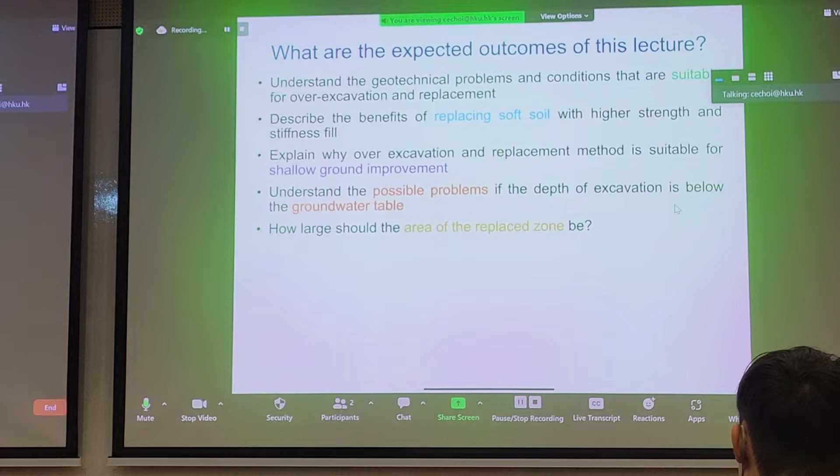Other issues: we have to identify when shallow replacement is not a suitable means of ground improvement. And last but not least, we need to assess whether carrying out replacement somehow distributes stress deeper into the ground, with an enhanced angle of stress distribution. So the last point is, how big should the area of the replacement zone actually be? We'll try to answer all these questions in this module.

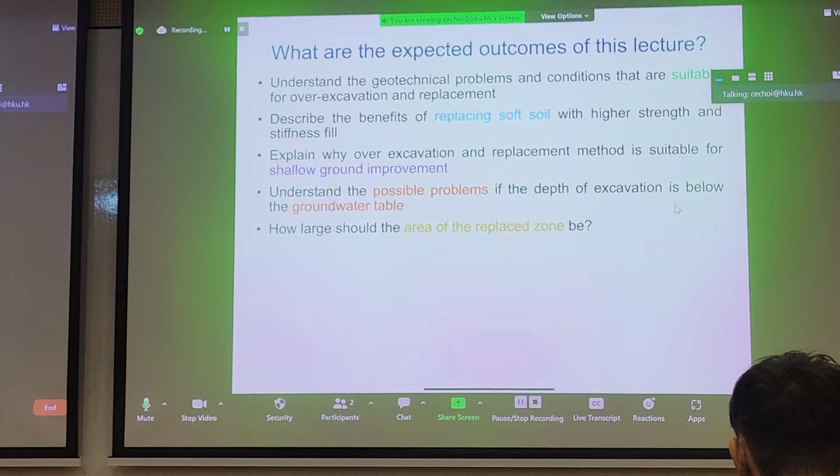Now, what is over-excavation and replacement? It's essentially a fancy term for excavate, remove soil, and replace it with stronger soil. Some questions you should be asking: how much soil should we replace? That's quite important, because the more soil you excavate, the more expensive it becomes. Once you excavate soil, you have to dispose of it, and disposing soil is not easy—sometimes you have to transport it far away, and you're charged per cubic meter of material disposed. So the first question is how wide the load spreading is and how deep we have to dig into the ground so that our shallow foundation is still capable of being serviceable and withstanding ultimate limit states.

As I mentioned in the beginning, the materials that we often use for replacement are very competent. We can use rock, very high strength gravel or sand, and some of these can be called engineering fill material in Hong Kong. We can also use chemically stabilized soil.

We'll talk about chemical stabilization in one of our later modules. Deep cement mixing is perhaps one type of chemical means. Pneumatic flow mixing is another.

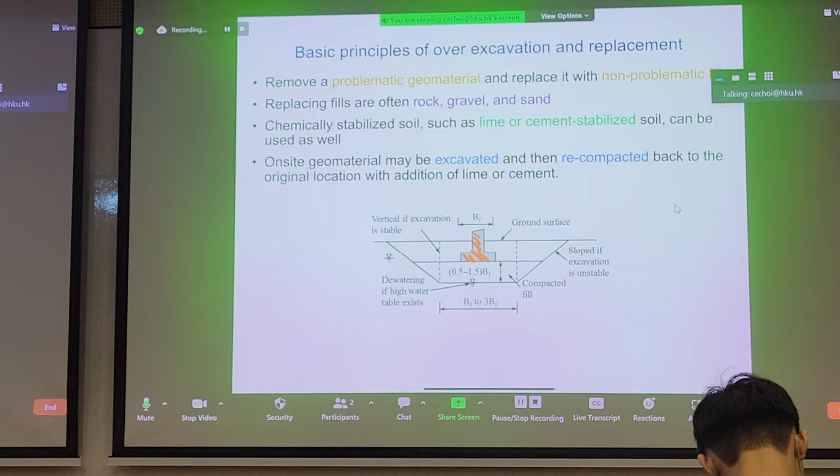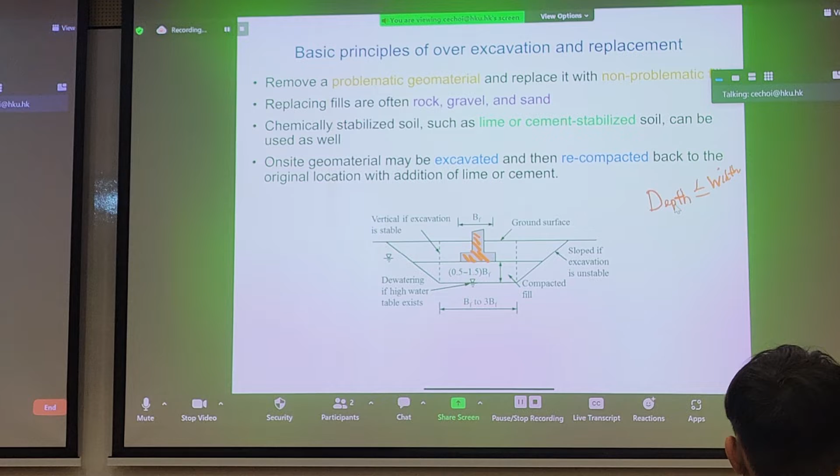If you take a look at the schematic at the bottom of the slide here, this is a typical shallow footing. For those of you in foundation course already, I'm sure you've covered this. So how do we denote whether something is shallow or deep? Well, the general rule of thumb is if the depth of your foundation is less than or equal to the width of your footing, we generally say that's a shallow foundation.

What are examples of deep foundation? Piles, right? Piles are deep foundation.

So this is an example of a shallow foundation. What you see here, we could probably assume it's a strip footing, meaning that it goes into the page infinitely. And what's the definition for a strip footing? Well, if your length to width ratio is greater than 5, we can assume that it's a strip footing.

And if you remember from your foundations class, Terzaghi's general bearing capacity equation assumes, from a rudimentary point of view, a strip footing. Of course, it can be converted into a circular and square footing, but we can adjust for those using shape factors, as you'll see later on.

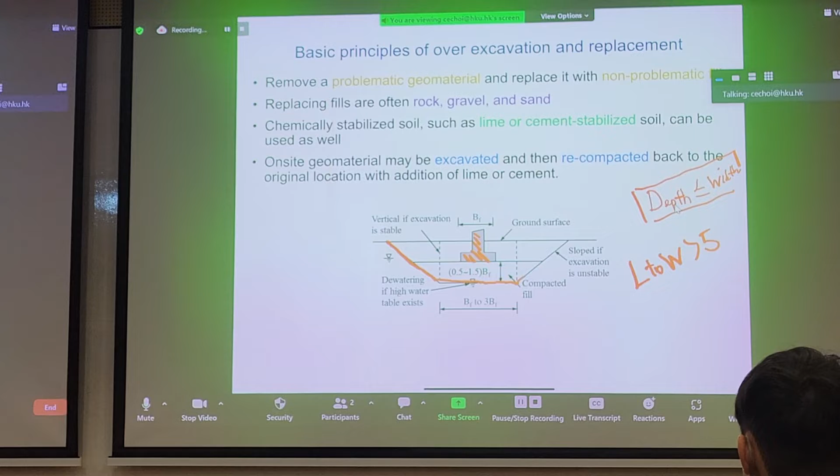So generally for over-excavation replacement, what we would like to do is think about this region here, particularly the soil underneath your footing. The soil underneath your footing needs to be strong enough. If it's a soft soil or clay, we want to remove it and replace it with engineering fill material. But then the question is, how thick does this fill material have to be? To answer this, you have to understand the prevailing failure mechanisms that can take place, and then design the thickness and strength of your replacement material based on overcoming these failure mechanisms.

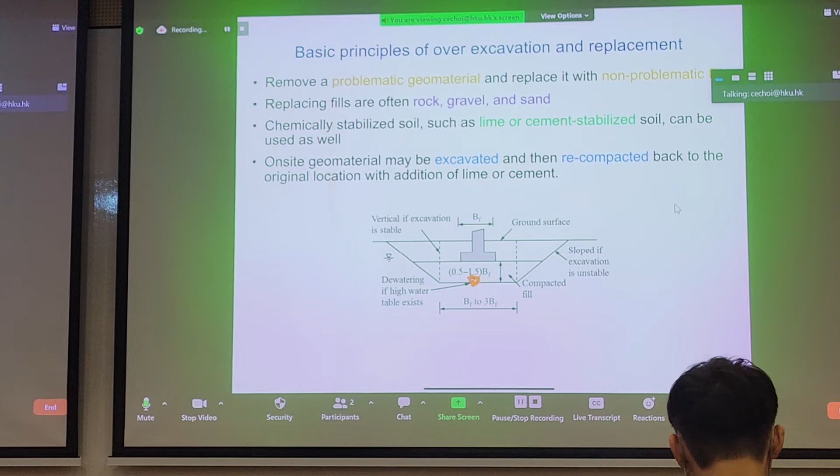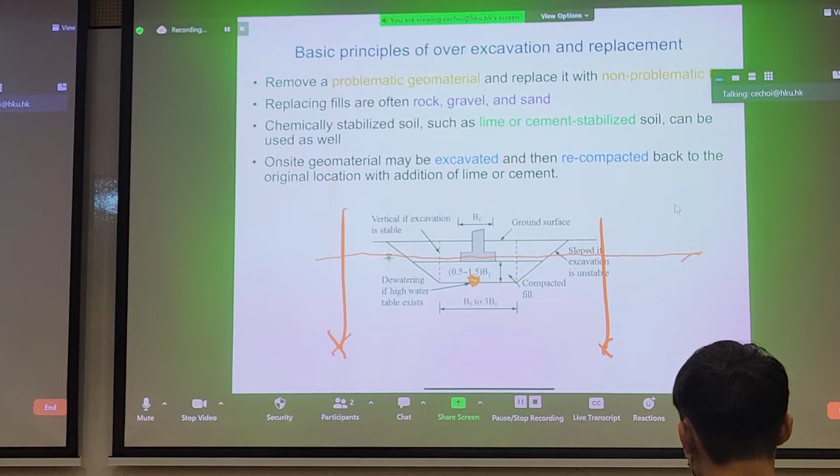Another thing you see here is the groundwater table. You can see it here, but often if you want to carry out replacement, you need to dewater the ground. Some ways you can do it are install dewatering wells, and if the groundwater table outside your excavation is here initially, then you can draw it down. Maybe sink another one here. You draw down the groundwater table so you can actually work inside the site first.

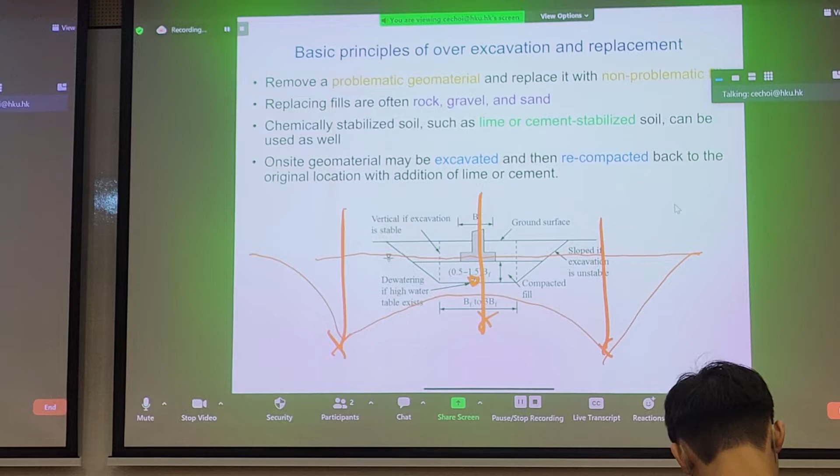So the main focus of over-excavation replacement is excavating and replacing. Now, under what circumstances is over-excavation replacement suitable? Well, there are loads of problematic soils, and we've covered this, including what you see on the slide here: loose fill, loose sand, silt, expansive soil, collapsible soil, liquefiable soil, and in colder regions, frozen soils as well.

These could excessively compress due to climate loading, due to subtle shear stresses, can even be seismic, and it can cause your shallow footing to punch through the soil.

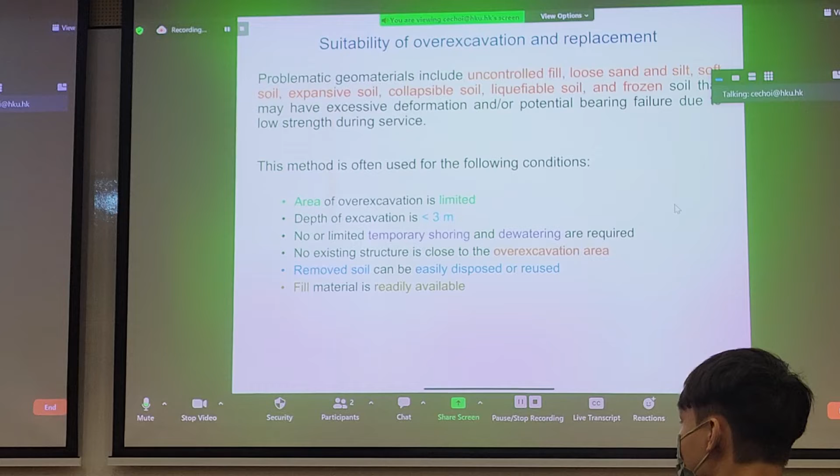We always talk about the birthday cake analogy. So if you have your hand on a birthday cake, if the birthday cake is not strong enough - let's say you have an ice cream cake, and you just took it out of the freezer, it's quite strong, right? You can push down on it. But if it's a cream cake, you're probably going to push right through. So that would be your bearing capacity, the cake analogy here.

So we don't want our shallow footing to punch through, or push through, or shear through our soil underneath. So any soil that you perceive as extremely low strength, you can assess this with what we talked about already: CPT or SPT.

Beforehand, then you probably want to excavate it and replace it. There are some limitations or points we need to consider when we carry out over-excavation and replacement. Evidently, this is a very expensive method. If you have an entire site full of problematic soil, your first solution is probably not going to remove all of the soft clay on the site. This is going to be extremely expensive because anything you replace has to be replaced. And these days, if we have sand shortage, we can't just excavate.

An example of over excavation would be dredging clay. If we have marine deposits in the sea, maybe a thin layer, we just want to dredge it, so we don't have to deal with it and replace it with sand. But these days it's quite difficult to dredge because we're worried about potential environmental impacts of dredging to the seabed ecosystem. So there are all sorts of challenges in place.

So excavation replacement is probably only quite suitable for very localized facilities. If you want to have a small building or small temporary works, then you could probably afford to excavate, or if the thickness of your problematic soil is not too deep, then you can excavate. So the general rule of thumb is we do carry out over excavation replacement for depths no longer than 3 meters. Otherwise it becomes quite expensive.

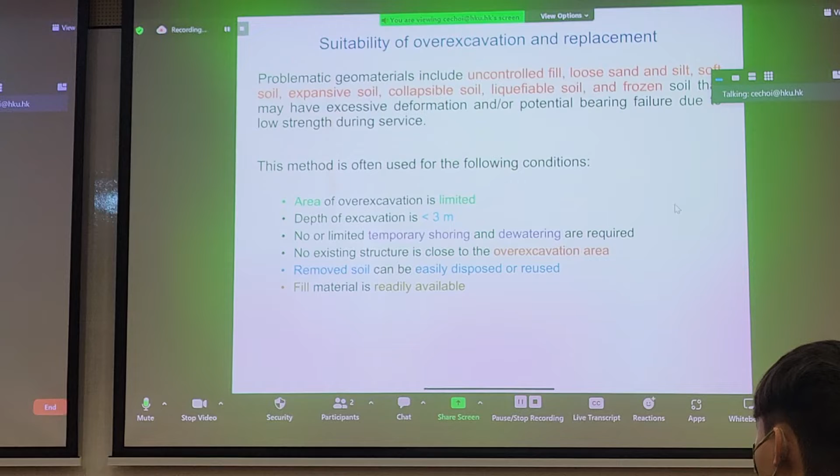Another challenge is if you're removing soil that's contaminated, for example, the third runway system of the Hong Kong International Airport, they were essentially building the runway right through contaminated mud pits. So if you're worried about the contaminated soil potentially releasing plumes of pollution into the ecosystem or environment, then you might not be able to use this method because excavating soils that are contaminated will probably cause you substantial headaches.

Last but not least, in order to use this method, you have to have a readily available supply of fill material. If you are located in a very remote site and you're unable to transport haul trucks full of engineered fill, or it's too costly or too far away, then you're probably not going to go with over excavation replacement because it becomes economically unfeasible. So these are all engineering considerations that we need to take into account before we jump on the bandwagon of over excavation and shallow replacement.

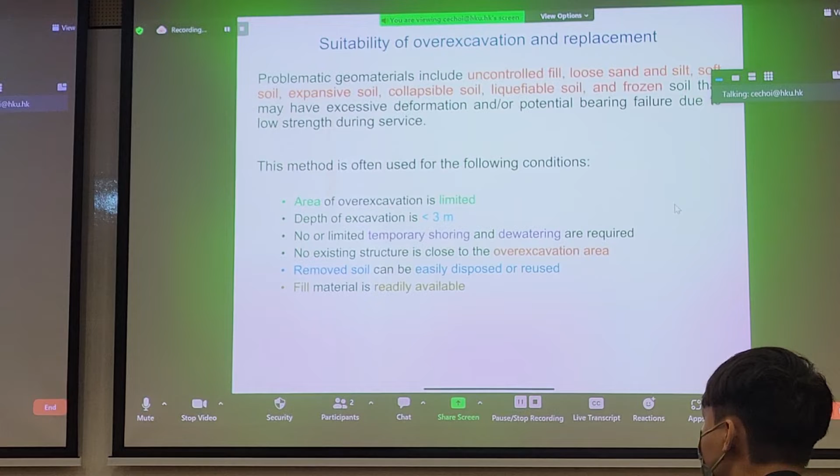Now, in terms of application, it's of course quite limited because you're only dealing with very shallow depths of soil. But if you want to increase shallow foundation bearing capacity, of course, this is the main goal of over excavation replacement. By replacing problematic soils with something stronger, more competent, you increase the stiffness, and if you increase the stiffness of the soil, you reduce compressibility and settlement.

For problematic soils that we don't really encounter, like loess soils that expand, shrink, collapse, or freeze-thaw cycles in the northern hemisphere, this method might be useful, especially for frozen soils, which generally are susceptible to climate loading for the upper several meters, where the bottom or the deeper material is often frozen permanently.

And as you can predict, we're mostly dealing with strip, square, or rectangular footings, which means you're probably not dealing with massive skyscrapers because you're not transmitting significant loads to the soil here. So anything with shallow footings. And anything shallow, of course, is synonymous with highway and railway construction embankments. We can often remove portions of problematic soil if we're going to have a railway line alignment that cuts through problematic areas. If it's not too deep, we can replace this problematic soil. So these are potential applications.

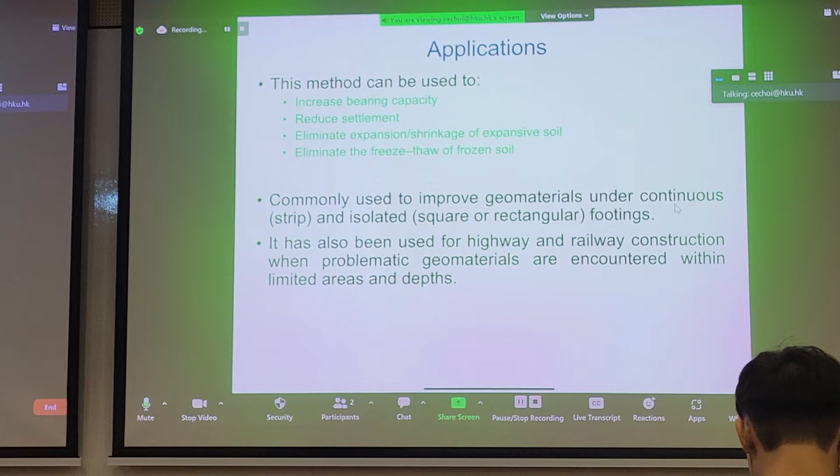Over the past couple of slides, I've hinted at potential strengths and weaknesses of over-excavation and shallow replacement. It can be cost effective if you only have a small area to replace, but if you have a massive site, it's not economically feasible.

So it's cost effective if you have a very small area to replace, you can ship in fill material, and it's easy for you to dispose the soil. For example, if you don't have to dispose contaminated soil, it becomes a lot easier.

In some places around the world, what they do is they take the problematic soil, could be clay, they inject cement or some binder into it. They also inject compressed air into it. They mix it up, and then they replace it back into whatever they dig up. This mixture of problematic soil, binder—could be cement, lime, slag—and compressed air becomes a new type of fill material that you can use for construction because it gains strength due to the addition of binder.

We call this pneumatic flow mixing. Some parts of Japan had their airports reclaimed solely by pneumatic flow mixing, by excavating, strengthening, and replacing. It's called pneumatic because we use compressed air to transport this mixed material through pipes as well.

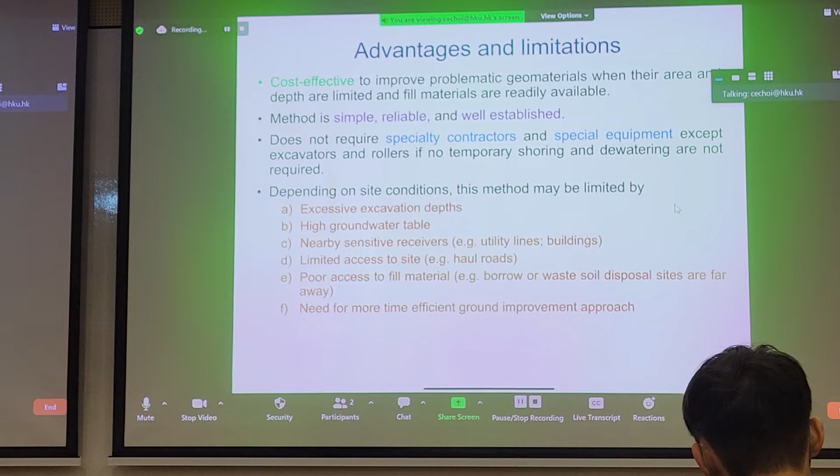And synonymous with the need for quality engineering fill, if you don't have access to the site, you don't have haul roads, you don't have transportation, then you can't replace because you don't have any replacement material. Likewise, if you don't have fill material, or it's too expensive, like sand or gravel, you cannot carry out replacement.

So if all of these circumstances happen, then you probably need to look at an alternative, such as chemical improvements, preloading, and so forth. You can still bring in concrete blocks or something. Notice that we've covered several methods for ground improvement so far, so you need to sometimes think about which method suits a particular construction site. That's your job as a geotechnical engineer.

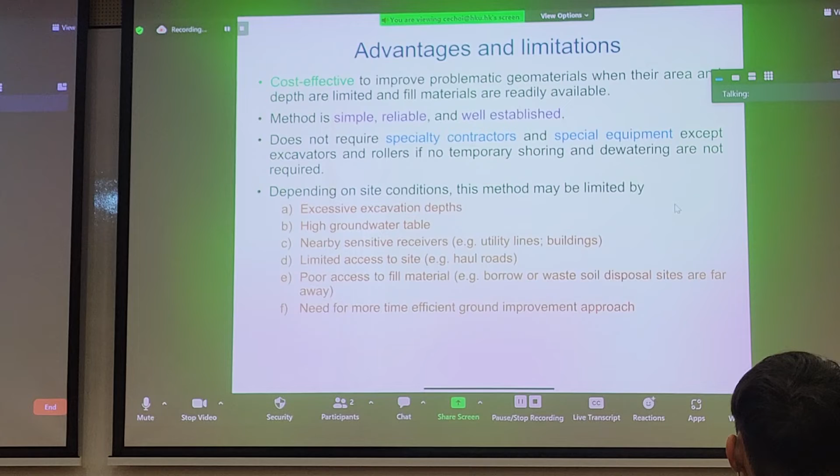So another question that we have to answer is, what is the extent of replacement? How much material do we need to replace? How wide of a site do we need to replace? Do we have to entirely remove all the soil and replace it with engineering fill, or can we only partially remove the soil, mix it with the binder, and dump it back in? It depends on what's a more economic approach based on the advantages and limitations that we discussed previously.

For special soils that we talked about—expansive, collapsible, frozen soils—you just want to replace everything to a depth where you don't have to deal with these problematic soils. This is quite obvious. Same with the width. For loose fill material, loose sand and silt, soft soils, your depth and width of excavation needs to exceed—well, basically there are 4 failure modes that we'll talk about in the following slides. We're concerned about 4 potential failure modes, and if we can overcome these and do some calculations, that would be the limiting factor for your depth and width. So these are the aspects we'll talk about in the forthcoming slides.

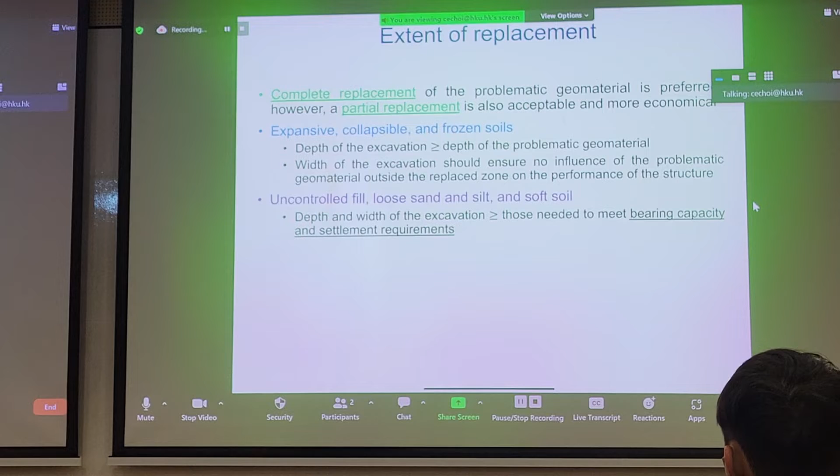So let's jump into the topic at hand. For any footing, let's define some basics first.

We often want to deal with the net pressure. What's the net pressure? If you look at the schematic here, you have some force applied to a shallow footing. The net pressure is the difference between the applied and the resisting forces. In this equation, you have applied force P, the weight of the footing itself distributed over the area of the footing, and we subtract the contributions from the effective overburden, essentially the effective stress propping up this footing. The effective stress is calculated based on the unit weight times some depth of your footing. This is what we refer to as net pressure applied to the base of the footing.

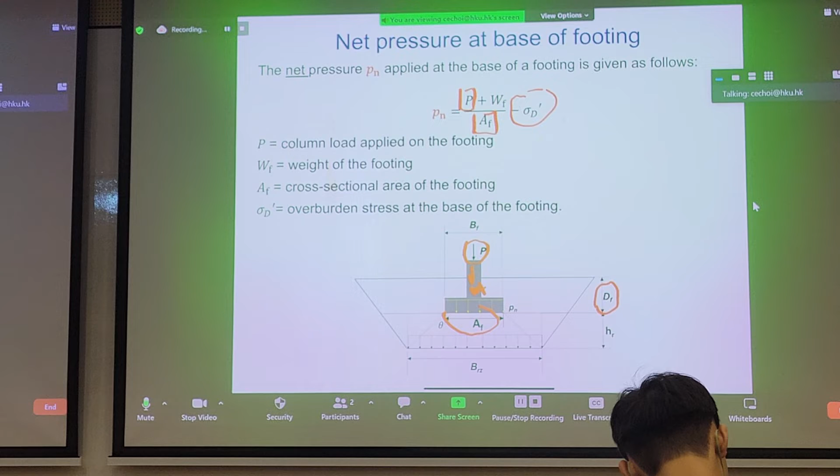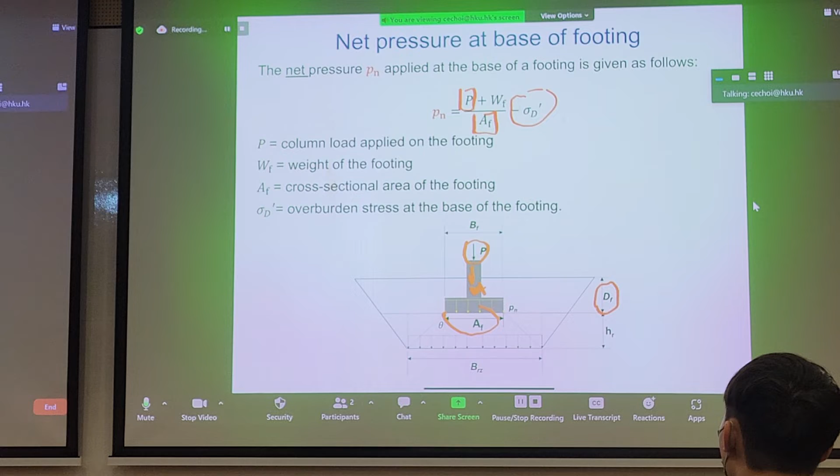Now, if you look at the schematic, it's quite interesting. When we talk about the extent of replacement, we know based on soil mechanics that when you apply some stress to the ground, we often distribute loading at some particular angle, theta. So when we distribute the loading, the applied area becomes larger. We can see that the width, originally called width of footing B subscript F, becomes B subscript RZ, which stands for replacement zone.

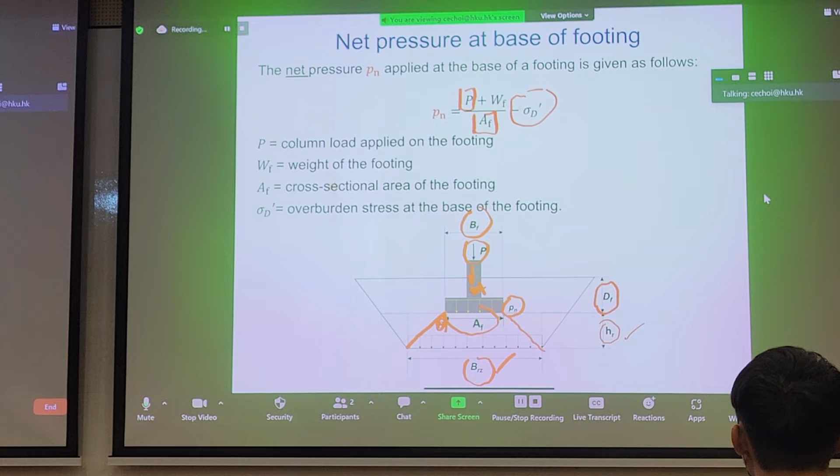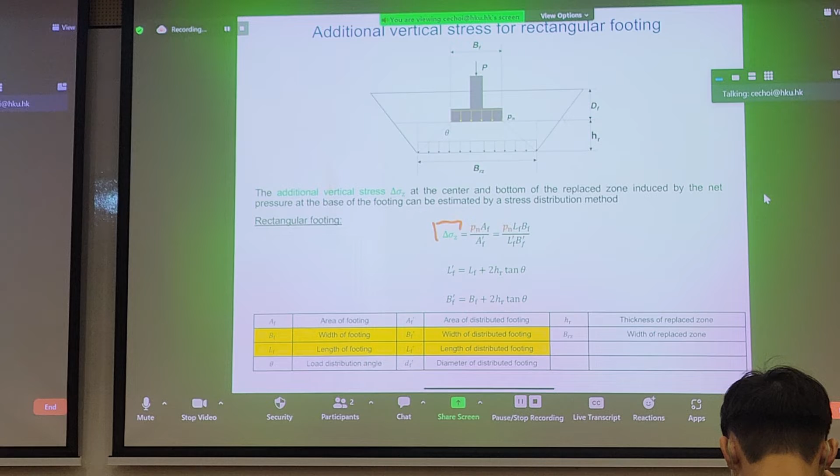Now, to further expound on the concept of stress distribution, we can assess the additional vertical stress for a rectangular footing, shown in green here as delta sigma z. This delta sigma z is generally assumed to be at the center and the bottom of the replaced zone. This is the replaced zone, this is the original, or in situ soil. Outside of the zone, we use a different color - this is the in situ soil. Since the soil above the footing only contributes an overburden, you can sometimes throw the in situ soil back on top, so only the red part is the new engineering fill material that we bring in to the site.

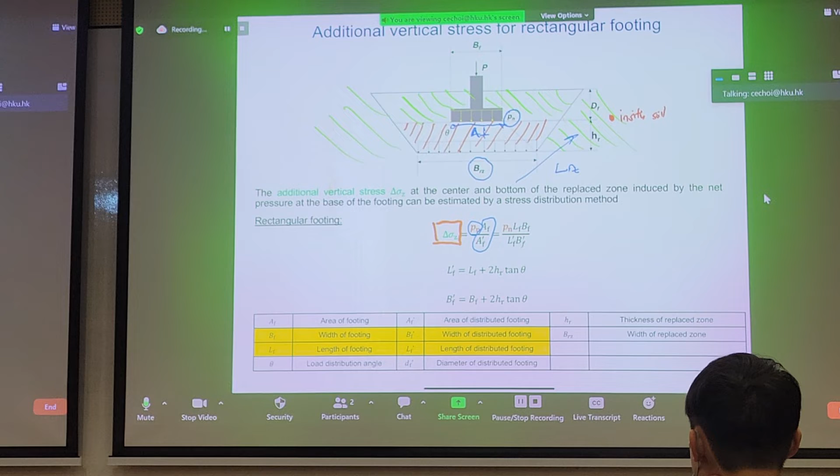Now, for this particular problem, it's purely geometrical. What do I mean by that? We know the net stress here, and we can use a ratio of areas. The area of the footing is here, and the area of the replacement zone would be B times some length into the page of the replacement zone, giving you your area A F prime, where prime denotes the replacement zone area. So the stress is distributed to a larger area, and that's the point of carrying out replacement using a more competent soil. The initial area of the footing is the base of the footing times the length of the footing, depending if you have a strip or a square footing.

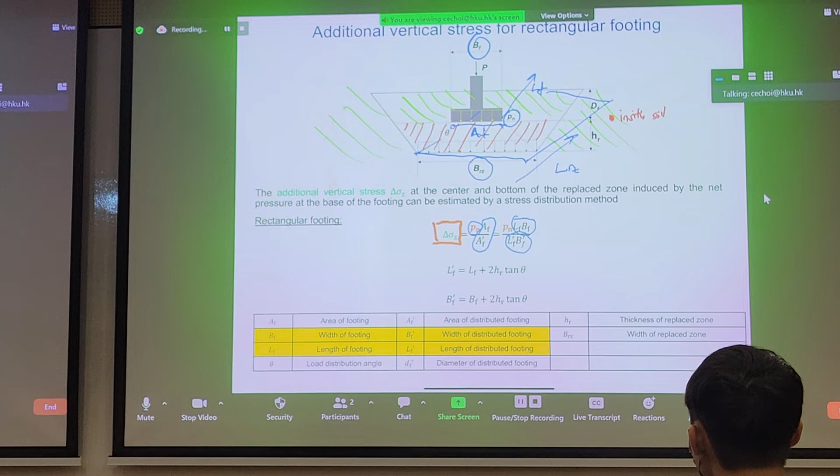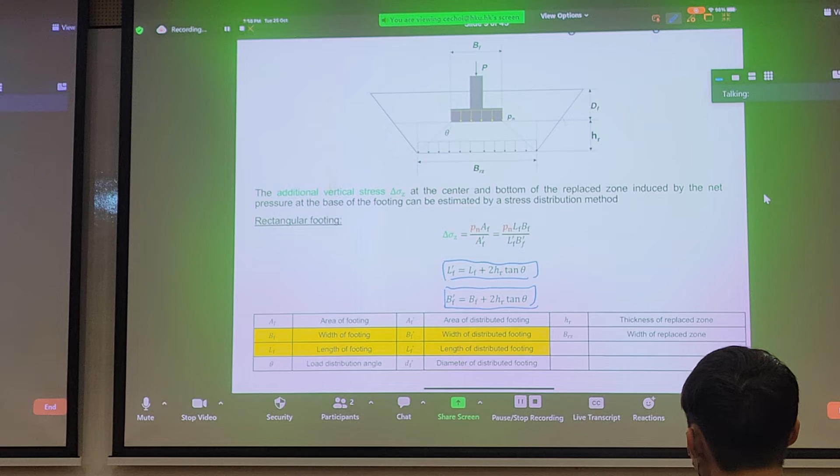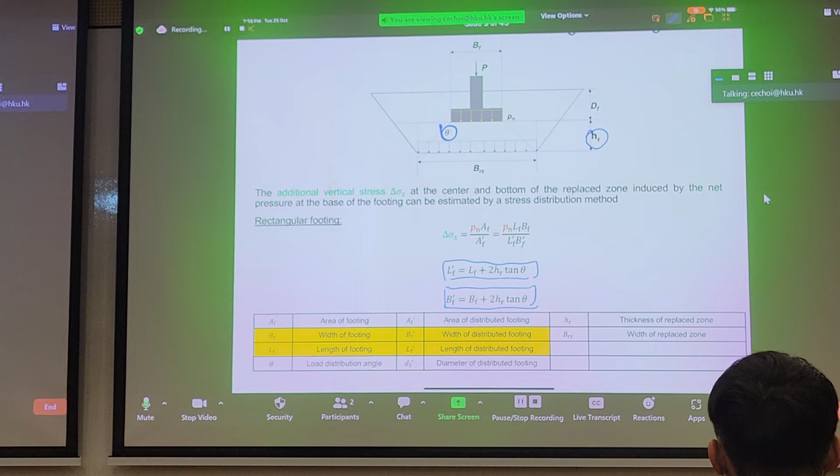And this is the length and width of the replacement zone area, some area you draw in 3D inside the page. You can define L prime and B prime using just trigonometry based on HR and some replacement angle. We'll talk about load distribution angle later on, but it mainly depends on the failure mode, and we'll talk about how to estimate that. So all the variables here describe a rectangular footing. If you describe a circular footing, your length scales will change - you'll probably use the diameter.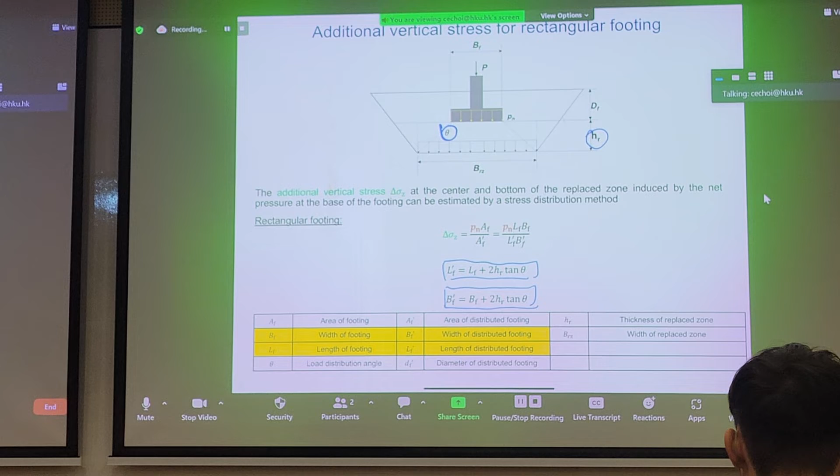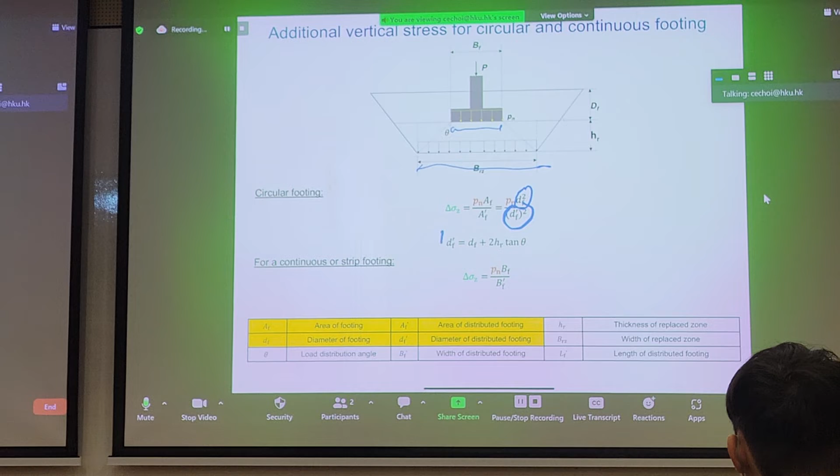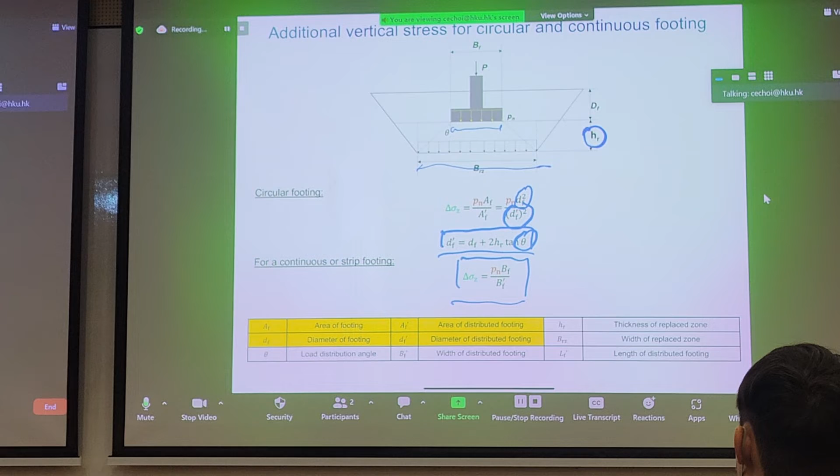For example, if you want to change this to a circular footing, we're looking at the diameter - if you look on plan view, this would be your diameter, and this is the diameter of the replaced zone. You can calculate it also based on trig, based on your height of replacement zone and some load distribution angle, which we'll talk about later on. If you're dealing with a continuous or strip footing, then we only care about the width, because everything is unit run into the page. So you have some net stress over a ratio of areas - that's the change in applied stress.

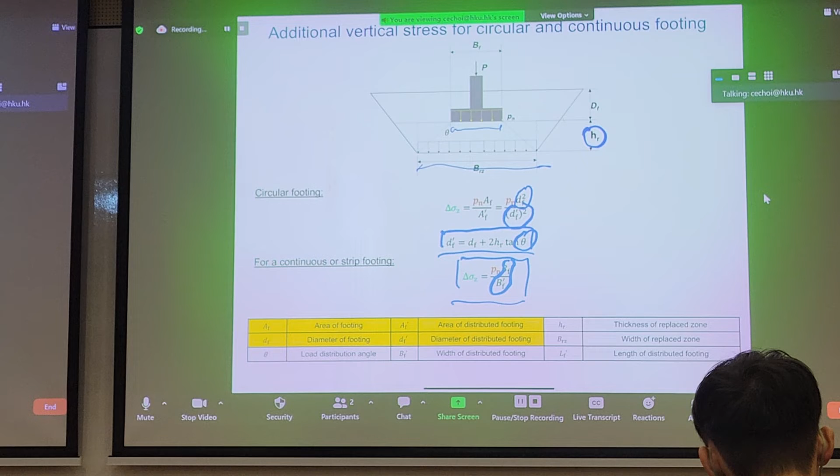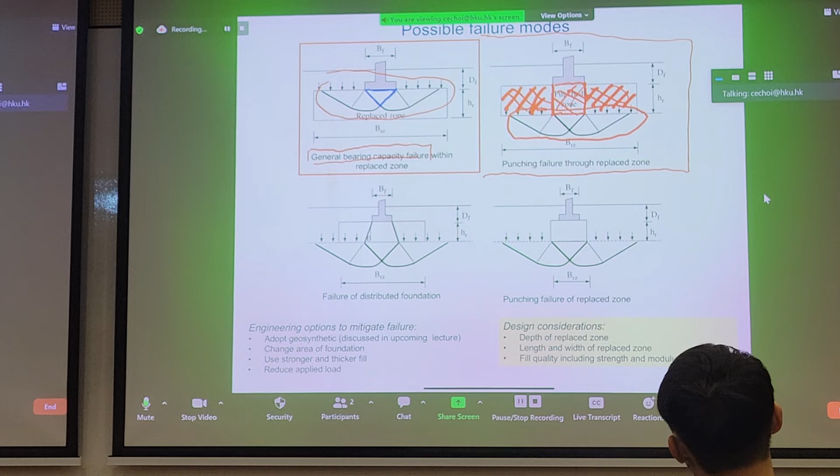So even if you do replacement in this red box here, this box here is the replaced soil. Even if you replace this box, you can still get bearing capacity failure underneath your replaced soil if you don't cater for punching failure. So we call this punching failure through the replacement zone. That's another mechanism that we'll consider.

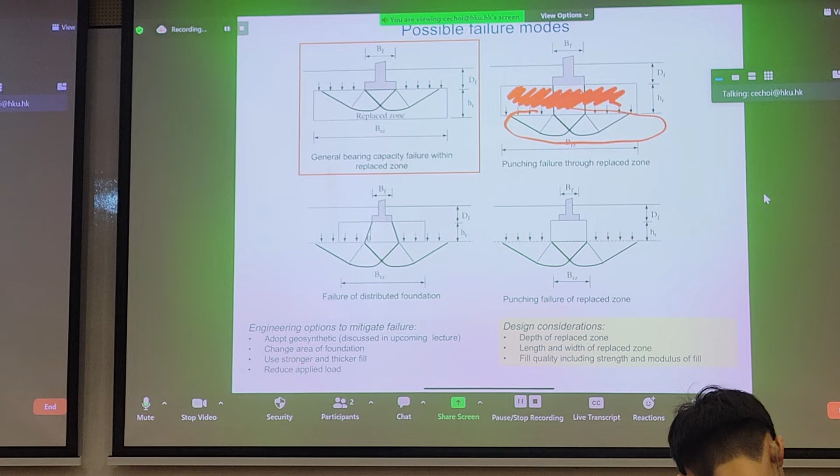Likewise, this is your replaced zone, in this box here, you can get bearing capacity failure of your replaced zone. We're not looking at bearing capacity of the in situ soil because we're doing replacement. Evidently, the in situ soil wasn't strong enough. That's why we had to replace it in the first place.

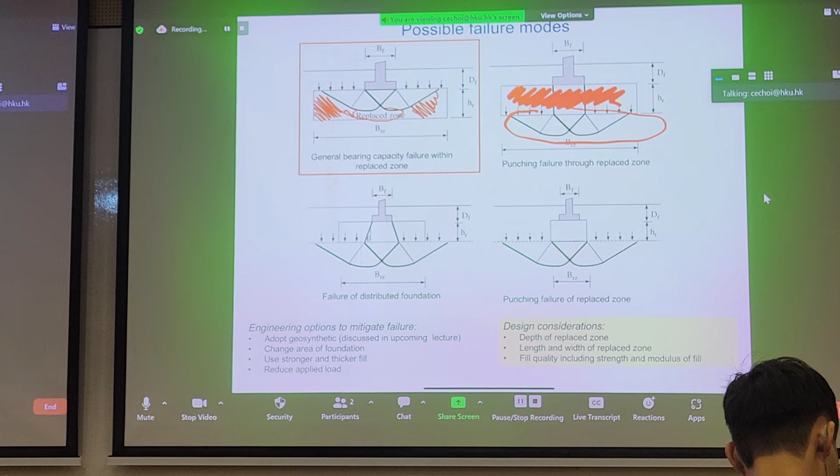So just a quick summary: this mechanism here is just a general bearing capacity failure of the replaced zone. This mechanism here is you form some sort of punch right through the replaced zone, and you get general bearing capacity failure underneath the punch zone in situ soil.

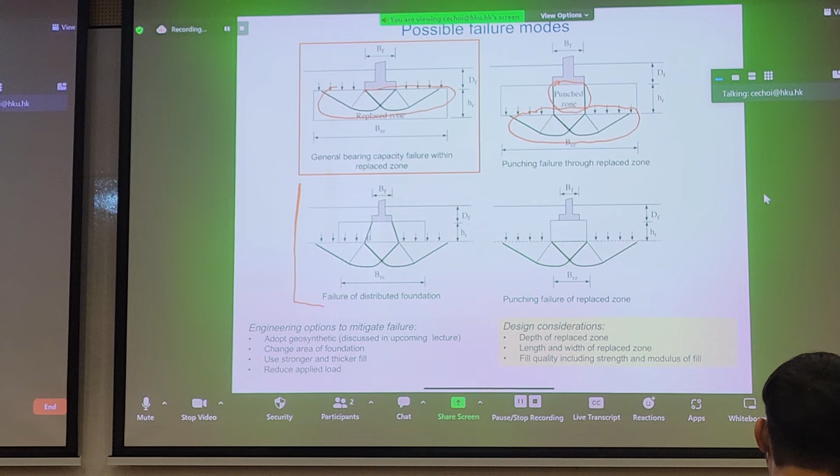Another potential mechanism is you don't punch right through. Punching right through would mean you have an almost vertical punch-through zone here, but you can also distribute load through the replacement zone and then get bearing capacity failure. So that's another mode of failure that we need to account for. We call this failure of a distributed foundation.

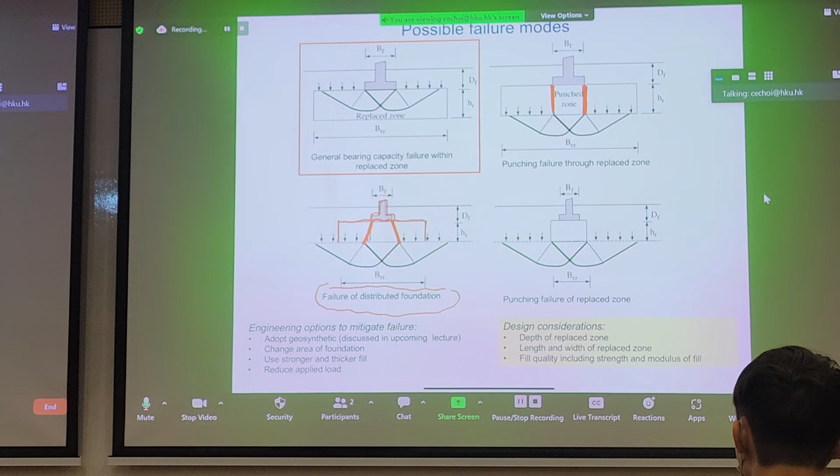When we talk about foundation, we consider this replaced zone to be part of the foundation along with the shallow footing, because as geotechnical engineers we engineered the replacement zone, so we consider that as part of the foundation. That's why we say failure of the distributed foundation. In terms of parameters, nothing much has changed here.

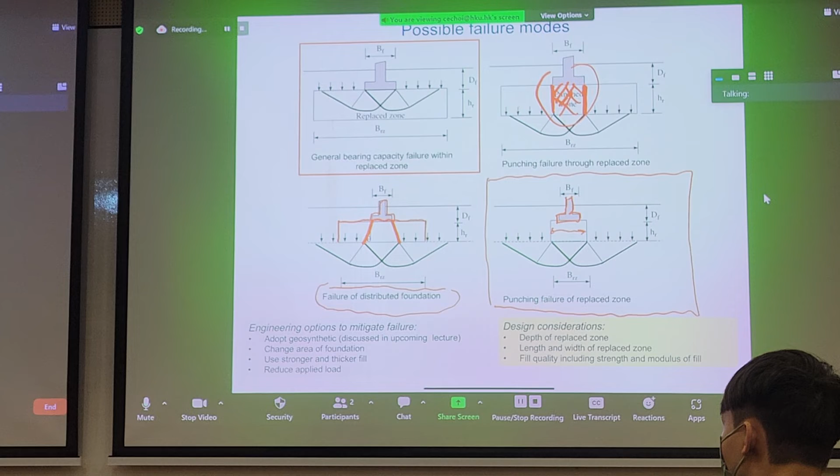In the last failure mode we'll look at, we have a punching failure of the replaced zone. What happens here is you don't even have to worry about the plug forming in here. The problem here is the replaced zone wasn't wide enough. This is one of the extents, the width of the replacement zone. What happened was you basically increased the size of your footing and the weight of your footing, and you punched through the soil underneath, causing general bearing capacity failure. So that's the last mode: punching failure, replaced zone.

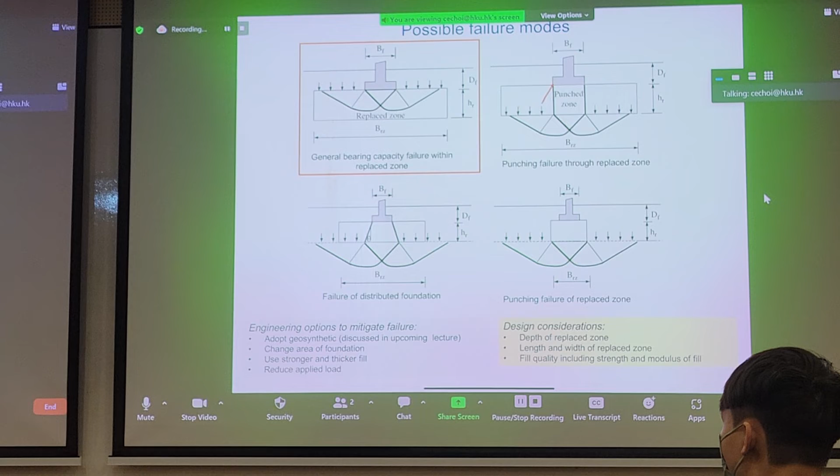If you look at these four modes carefully, you'll notice something that's the same for all four: we do have to assess general bearing capacity failure for each of these modes. For the punch zone, you can imagine that there's some passive resistance here propping up this plug, right?

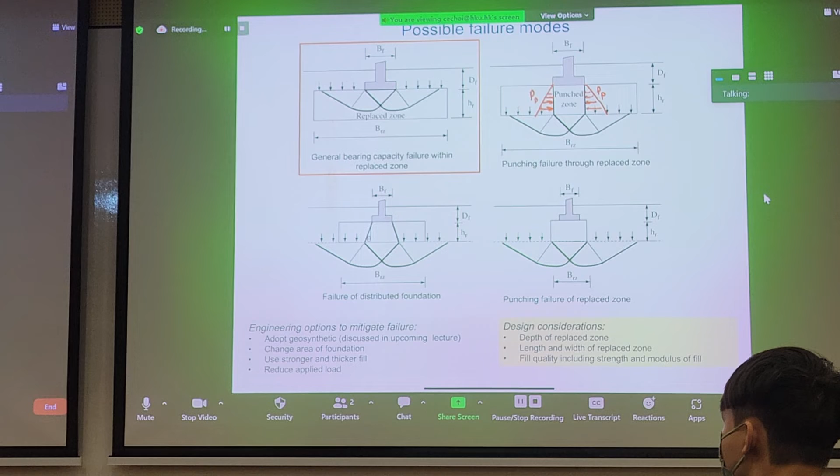So we always come back to basic soil mechanics. I uploaded some basic materials on Rankine earth pressure theory, so we always come back to passive resistance. You can imagine that when you push down on this, there has to be something holding this plug together. Likewise, anytime you form a plug, there has to be passive horizontal stress holding this plug together. So we'll go through this bit by bit in the following slides.

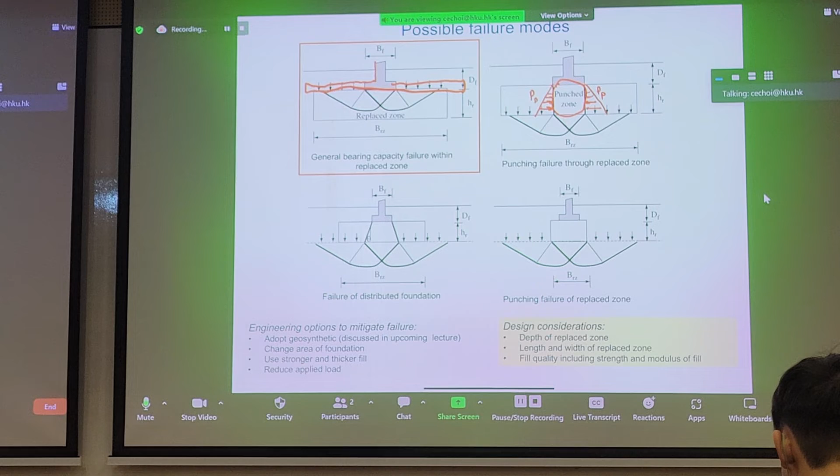Before we do calculations or look at the mathematics involved, at the bottom of the slide there are some options you can do empirically to prevent these four failure modes. We can use geosynthetics—we'll talk about what geosynthetics are in the forthcoming lectures. You can just change the area of the foundation, right? You can make your footing much wider. You distribute the stresses, and you might not need to do replacement at all. If you increase your footing size to something much wider, you solve yourself a lot of headaches, but then you have a much wider footing.

You can use stronger fill or a thicker fill layer. Usually for fill, it's drain material, and we just look at it in terms of some phi dash. We can find a fill material with a very high friction angle—that would help, right? If it's not just 30, if it's like 40, 45, very coarse gravel material, we can minimize the effects of these failure modes.

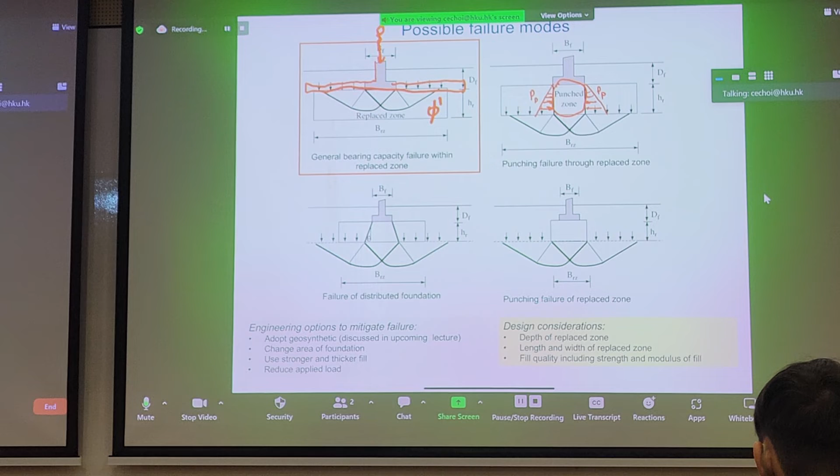Last but not least, just reduce the load. So if you have some load P here, don't have such a high load—have more footings, distribute the loads on the footings, then you don't have to carry out replacement. So these are engineering options, quite common sense, right?

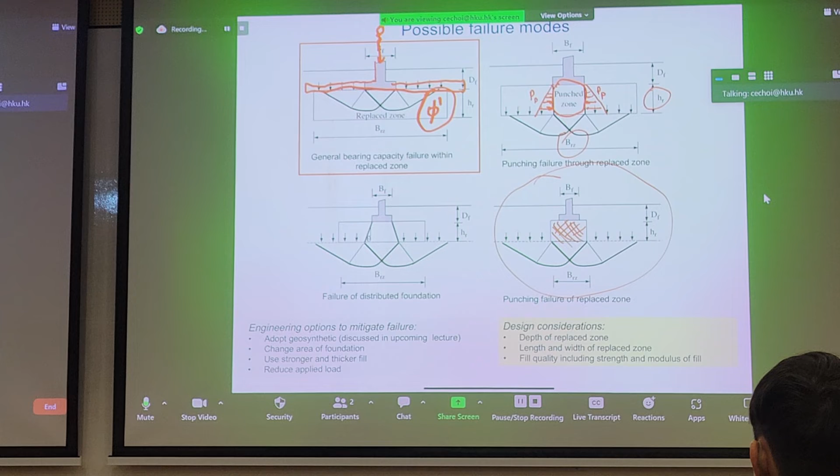In terms of design considerations, there are a few things we need to consider based on these four modes. We have to find out what's HR, how deep we should have it so we can overcome these four failure modes, and what's the width of the replacement zone. The width matters, right? Because if you look at this failure mechanism, this replaced area became part of the footing, and it just punched through the soil underneath. So we need to decide what's the depth and width of replacement, and of course what's the strength of the material to prevent serviceability and ultimate limit state problems. That's why we talk about strength and modulus of the fill material. We'll go over these aspects in the coming slides.

Now, this is not really a quick review—I think we should talk about this a bit more. There are different bearing capacity equations. The one we're most familiar with from an undergraduate level that we often explain to you is Terzaghi's bearing capacity equation.

Can it be generalized? Well, yeah, it can. The one that we will use in our module is generalized. I'll give you the equations, I'll give you all the factors, so you don't have to memorize anything. But I do want to talk about where these equations come from—if not, at least let's talk about Terzaghi's bearing capacity equation.

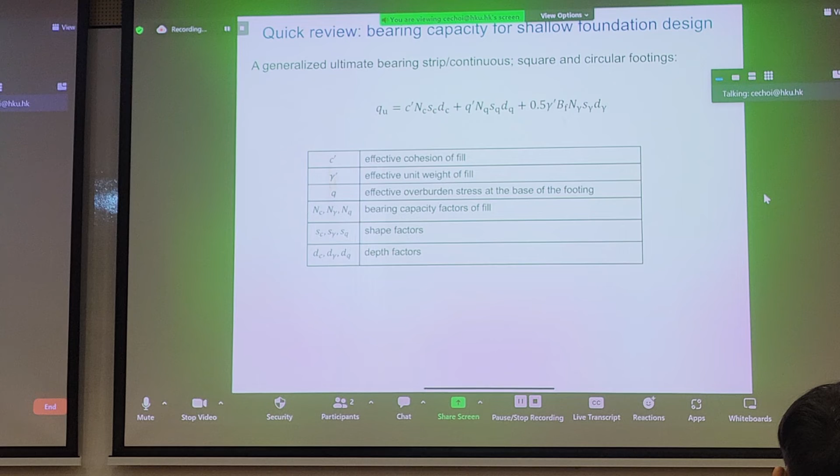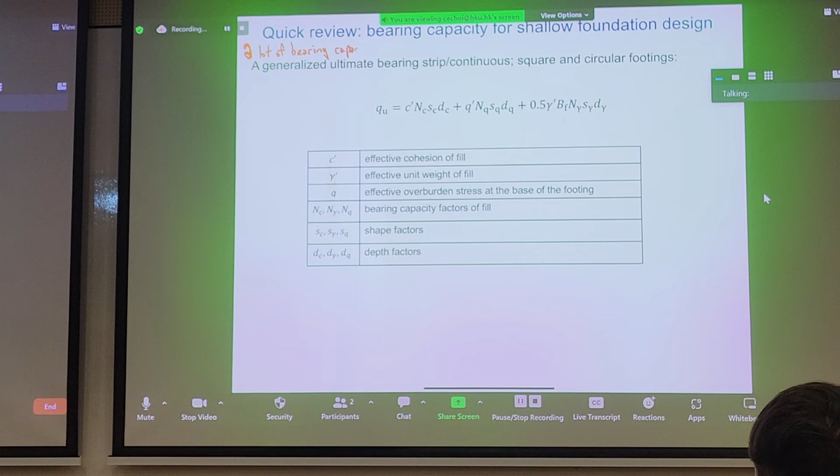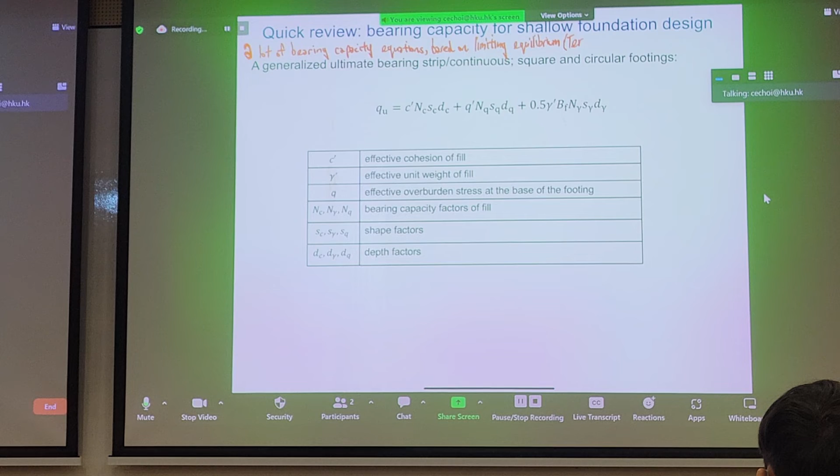So there are some points I want to write down. I want you to know that there are many different bearing capacity equations from different researchers and engineers. What we're using is a generalized form. The most rudimentary one is Terzaghi. So there are a lot of bearing capacity equations that we can use, all of them based on limiting equilibrium. The one that we often like to teach our undergrads, Terzaghi, 1943, for strip footing—I'll spend some time to talk about this one.

Other ones are Vesic, Meyerhof. So we also have Meyerhof, 1963. We have Hansen, 1970, and Vesic, 1973. Now you're thinking, are these bearing capacity equations different from these four authors? They're slightly different, but not substantially. For example, Vesic will assume maybe a different angle for the failure mechanisms—instead of phi dash for Terzaghi's general bearing capacity equation, he assumes 45 plus phi dash over 2, because this angle was proven using field observations and experiments. So are they fundamentally different? Not really. That's why we can generalize the equation.

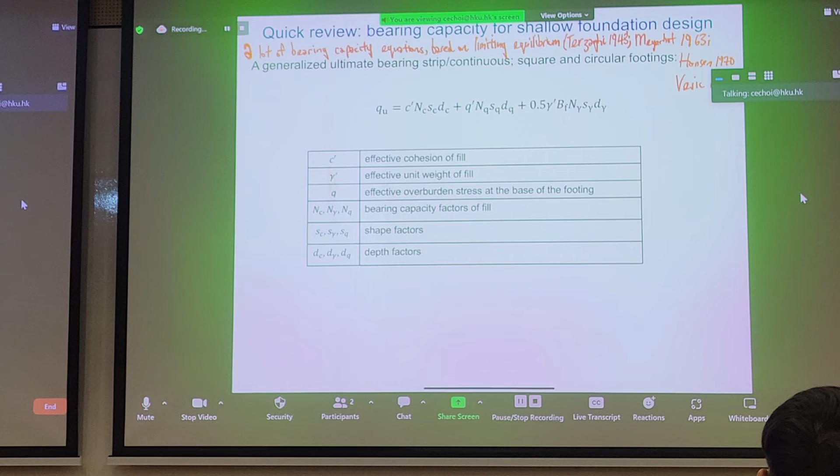So what you see here is a very generalized equation—the one you're probably used to seeing in this form, right? And so you're asking, what are all these other things here?

The reason I decided to use this is because I think it's quite confusing with so many shape factors, so many different Nq values, so many different Nc and N gamma values. Normally in undergraduate textbooks, we see this as an equation for strip footings. I guess in your other classes you probably get a nice table to extract your Nq, N gamma and Nc values, and you have to be quite clever, because they may give you a table for strip footing, a table for square footing, and a table for circular footing.

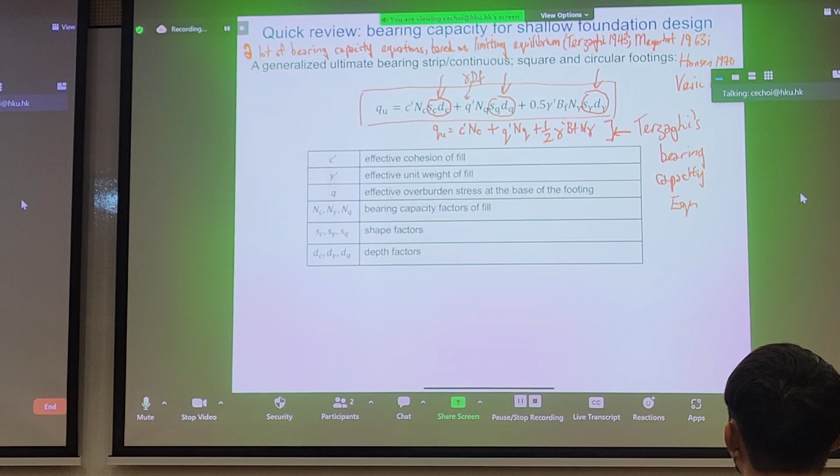Now, with any footing, what happens initially when you load it? Well, when you initially load it, you get a very small elastic response, but then everything becomes plastic right away. And if you try to load it some more, you just get settlement without any more resistance. That's why the load just drops off.

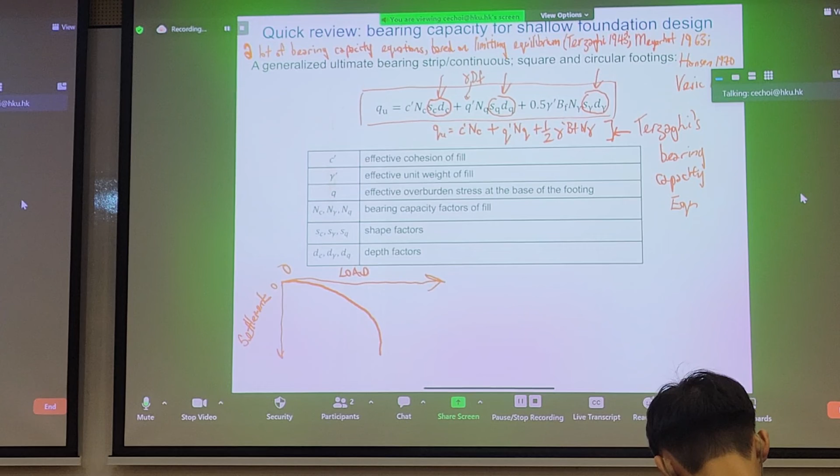So this is what happens when you keep on loading the footing. Let's talk about this from Terzaghi's bearing capacity equation. Just a quick recap—let's focus particularly on Terzaghi's bearing capacity equation, because most of the other ones are based off this anyway. So we call this Terzaghi's ultimate bearing capacity equation.

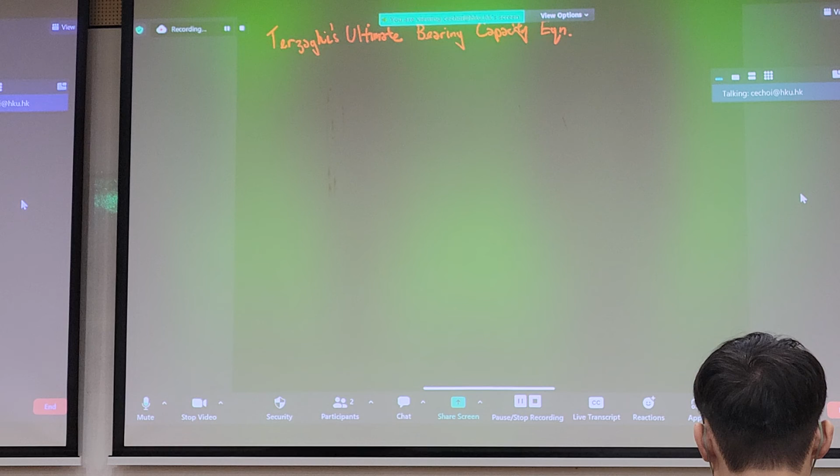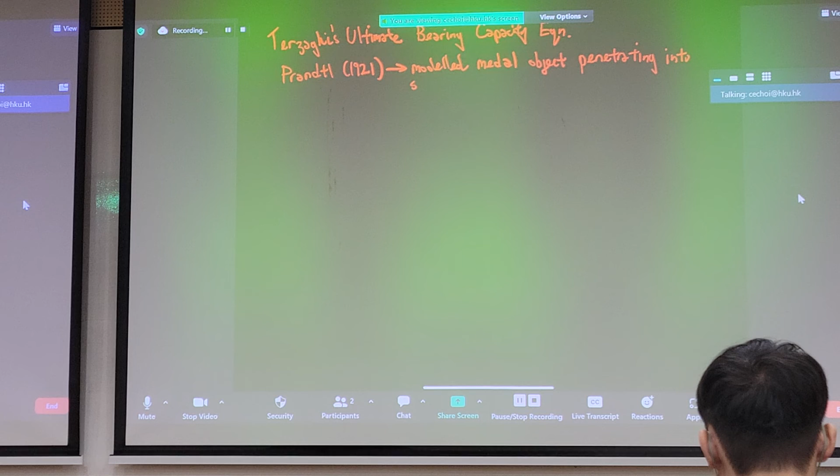Terzaghi's bearing capacity equation was, just a recap, originally borrowed from Prandtl. Prandtl essentially modeled a metal object penetrating into softer material. And then it was Terzaghi that borrowed this concept in about 1943 to extend it for a footing on soil.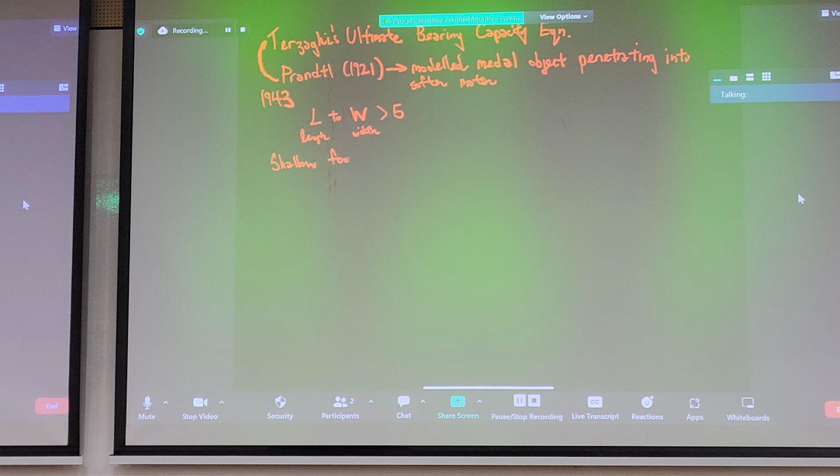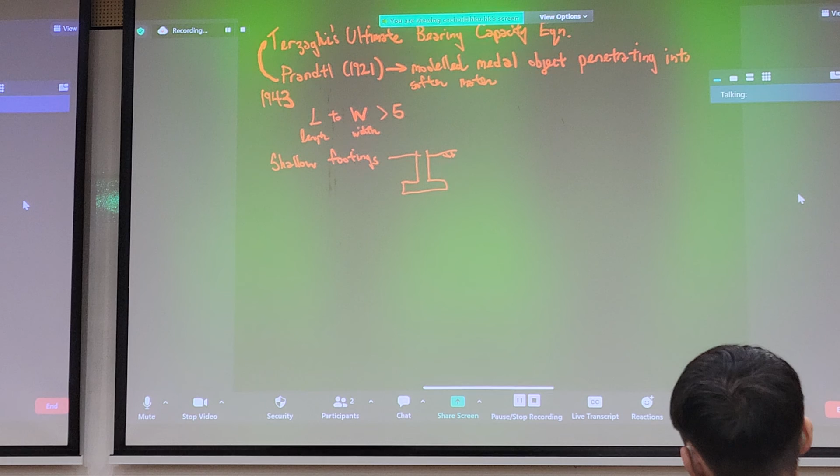So we mentioned a few assumptions that we need to assess. Terzaghi originally derived his formulation for strip footings, so the length to width ratio has to be greater than 5—this is length. And it's also for shallow footings. The definition of shallow footing is: we have footing here, some depth df, and b, the width of your footing. As long as your df is less than or equal to b, we can say that's a shallow footing.

Terzaghi's failure mode looks something like this: there's some embedment here, a load per unit area applied. We have some depth df, footing, and we assume that the surcharge can just be some unit weight times df.

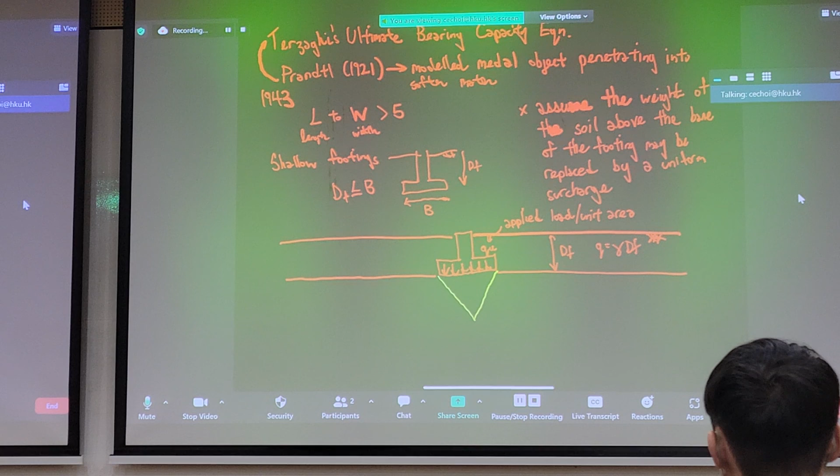So the failure mode that we're interested in here is essentially we have one region here, two other regions here. Let's call this zone 1, let's call these zone 2, call these zone 3. I'm not going to go into too much detail, but we'll talk about general failure mechanisms. Zone 1 is, let's say, some elastic zone. Zone 2, let's call it a radial shear zone. Zone 3, Rankine passive zone.

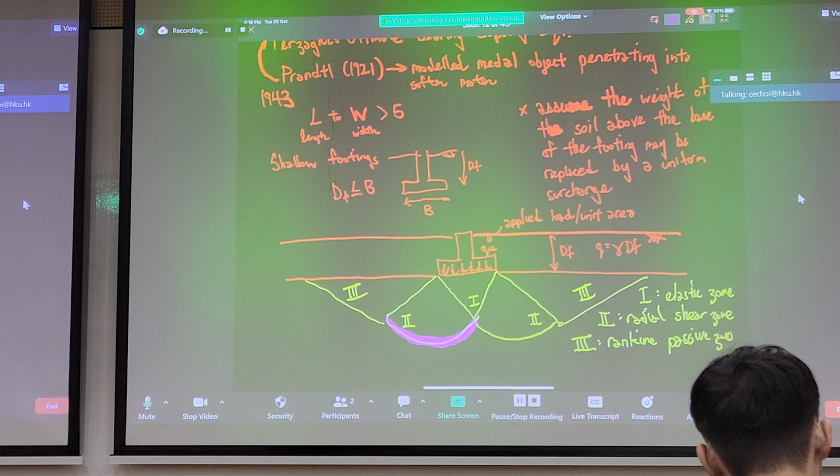And then if we look at these two pink lines here, we can say that these are just logarithmic spiral curves.

Okay, so why am I showing you this failure mechanism? Well, anything in engineering requires a mechanism—we need to draw it out, or how does it move when it fails? How does the soil fail, before we can come up with some analytical approaches to characterize this failure mechanism. This particular failure mode requires an assumption that your soil is linear elastic, perfectly plastic. So initially loading the soil, you get some elastic response that's recoverable, and if you keep on applying displacement of the footing, your soil will become perfectly plastic eventually.